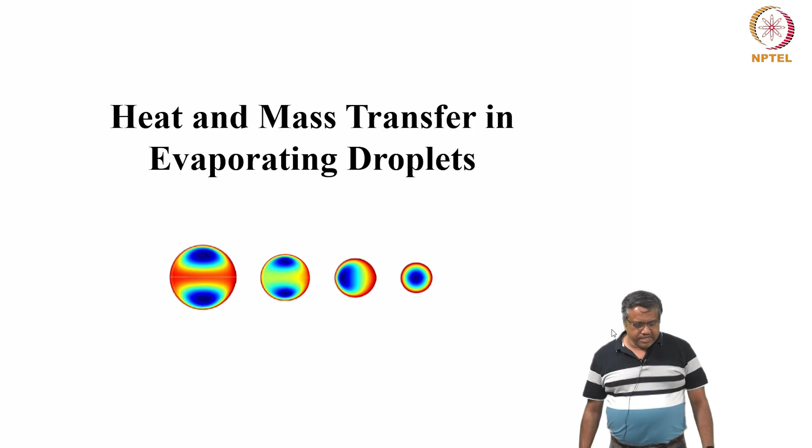So to understand the evaporation of droplets, we need a little understanding of how the transport processes actually take place. This picture that you see is what happens inside the droplet while it is actually evaporating. This comes from our own work - just a picture for now, but more on this later.

We start with the typical motivation - it is there everywhere. Sprays are everywhere, atomization is everywhere, so evaporation will be everywhere too. It's used in, for example, spray combustion, which most people here are accustomed to, and which we'll cover a bit later. There's also spray cooling, where you cool a surface, and spray drying, which will also be covered later in the course.

This isn't going to be covered, but it's something we've widely worked on - during COVID, the aerosols that come out of our mouth are also a spray that evaporates, and that's what infects you. The basic mechanism is still the same. What I'm trying to harp on is it can be a fuel droplet, a milk powder droplet, a polymeric droplet, or your respiratory fluid - there's salt and water in your mouth. The basic principle remains the same: it's evaporation of a droplet.

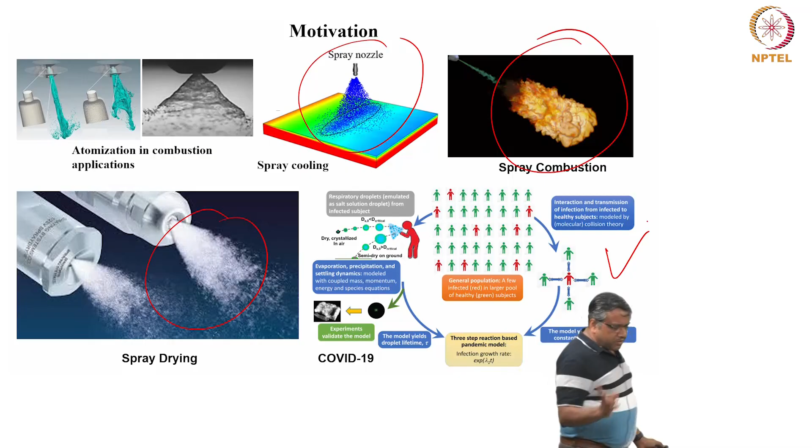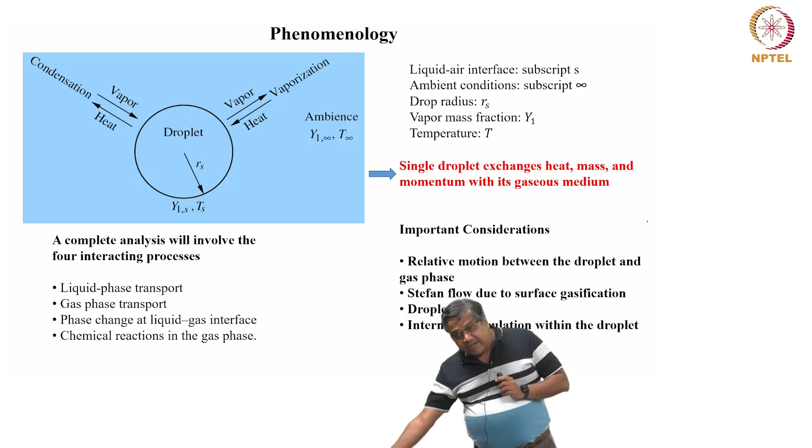Based on that, we're going to go a little deeper. What is the phenomenology of this? Here is a droplet - we're not talking about a droplet cloud, this is a single droplet. What processes can happen? This droplet exchanges heat and mass with the surroundings, with the ambient. The ambient can be of different types - heated, cooler, convecting, at any pressure, at any temperature.

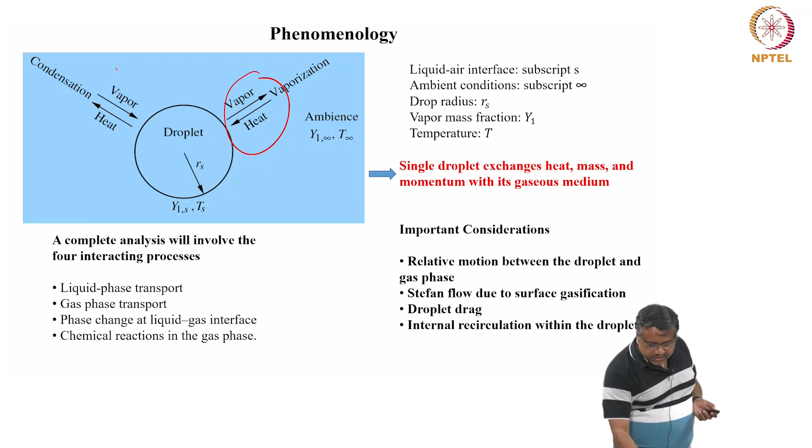If you want to analyze this particular problem, these are the processes shown, and this is the ambience. Ambience is always subscripted with infinity. And this S that you see is on the surface - meaning surface on the vapor side, not the liquid side.

A complete analysis means you have to solve a coupled set of equations in the liquid phase as well as the gas phase. You have to solve the Navier-Stokes equation in both phases, the energy equation in both phases - basically the temperature equation - and if there are multiple species involved, you have to solve n-1 species equations too. Not only that, phase change is happening at the interface.

Remember, this is evaporation - it's a surface phenomenon, so phase change happens at the interface. Therefore, you need to account for that, and all these equations have to be matched at the interface - liquid phase, gas phase, matched right there. And if there's a chemical reaction, which happens in combustion - combustion never happens in the liquid, it still happens in the gas phase, but it's a little removed from the droplet surface.

Where the flame will be placed is something we are going to talk about next, in droplet combustion.

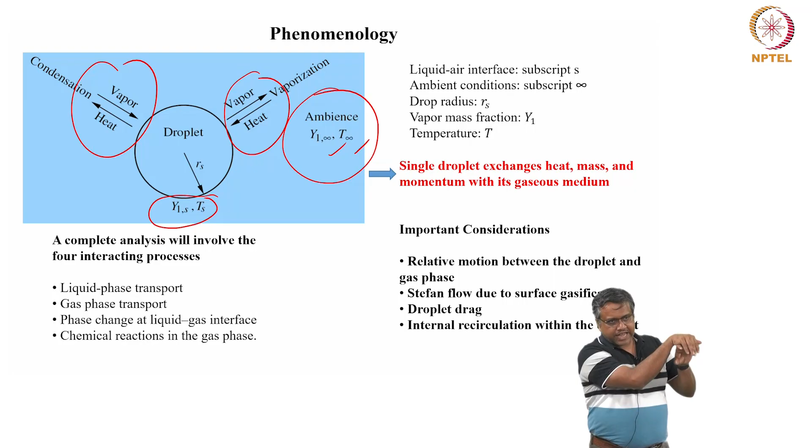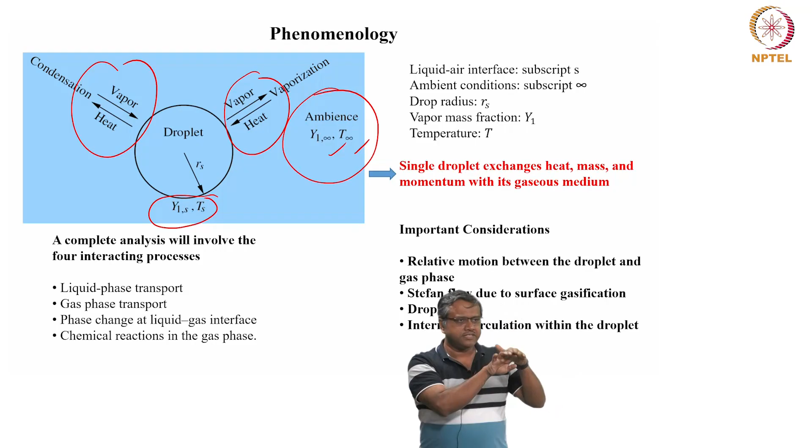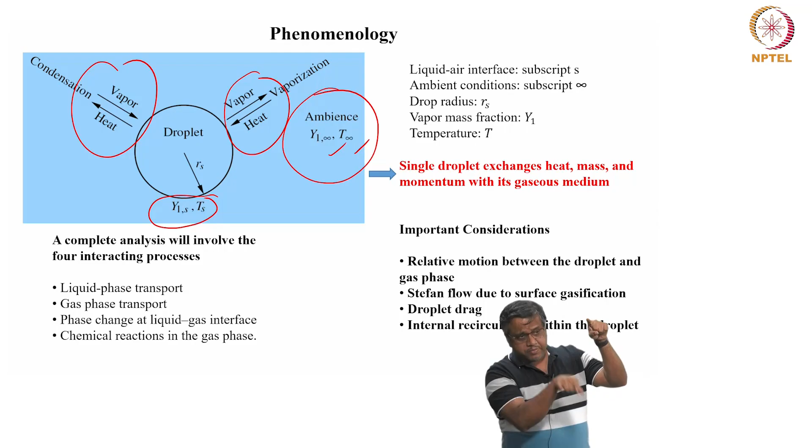There is also droplet drag because the droplet is trying to be decelerated in whatever flow field it's in. Since it's a droplet, not a solid particle, if there's flow on the gas phase side, there must be flow inside the droplet too. But the flow will be highly attenuated because of viscosity, since you have to match the shear stress at the interface. So it naturally slows down, but there will still be flow inside the droplet.

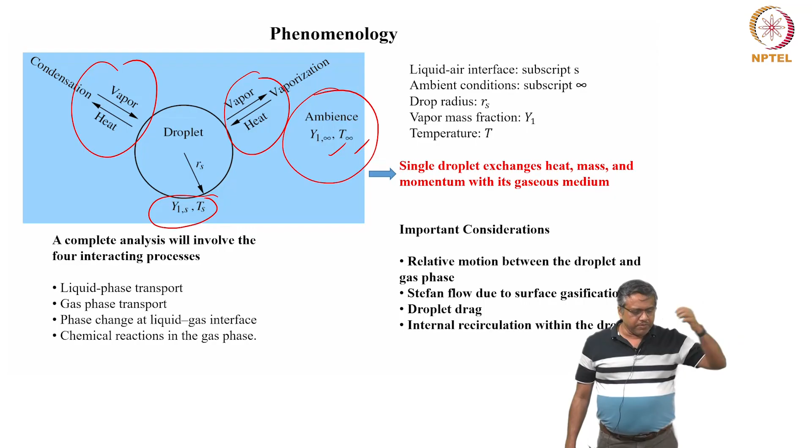We're talking about all these things because they're very important for the next stages. A single droplet, which seems like a simple thing exchanging heat, momentum and mass with the surroundings, is actually a set of all these difficulties.

There are other twists: the droplet can undergo deformation as it evaporates, so it may not stay in a spherically symmetric configuration. With multiple species, there are varieties of possibilities. Also, the droplet can be in an oscillating gas flow field, an aspect not usually touched in the literature, since it can be in a vortical field, a shear field, or many other configurations. Because of these crazy configurations, their heat and mass transfer is rather different than a straightforward flow. The droplet isn't like a bullet or a straight arrow - it can do all sorts of complex things.

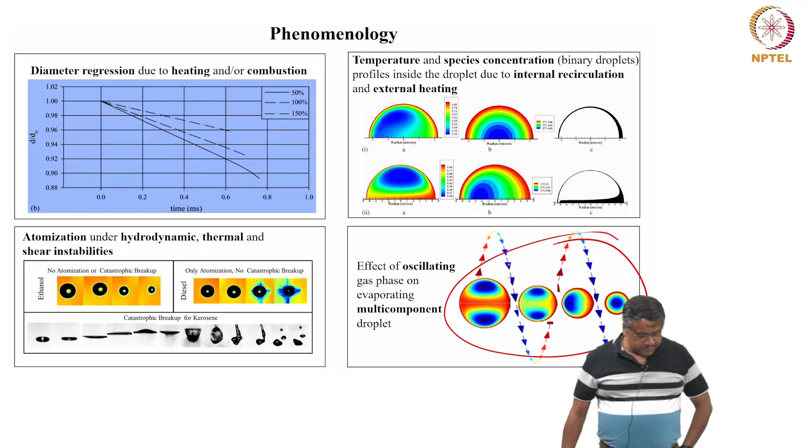This is a complicated problem, exactly the lower part you see here in an oscillating flow field. This has also been covered by us in a recent paper, looking at it from a COVID perspective.

Let's understand the transport processes in more detail. The idea is simple: the middle one is a droplet and it shrinks. So first you need to answer how the radius decreases with time - that's what you're concerned about. How does the radius shrink as a function of time? What is that function?

We can first break the problem down and forget about convective effects for now. Let's look at it just from a droplet evaporating in a quiescent environment. So we bring in the concept of quasi-steady, which we'll examine in terms of what it actually means.

The droplet and the corresponding field variables - T for temperature, Y as the mass fraction of the vapor, and C - everything around the droplet is spherically symmetric. This is usually the case.

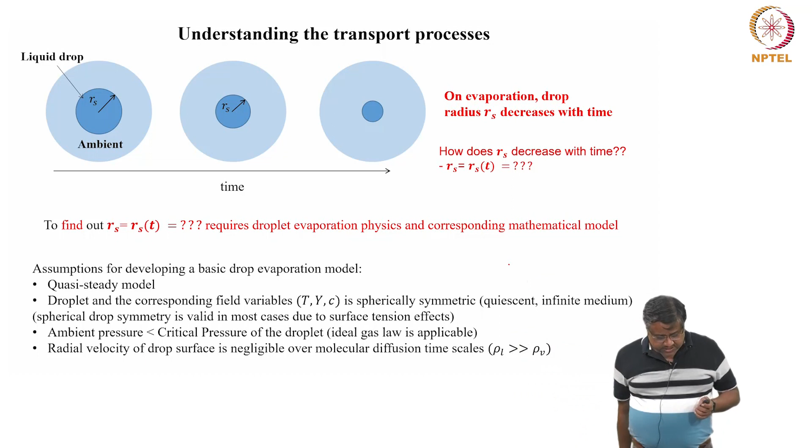The ambient pressure is lower than the critical pressure, so you're not dealing with a droplet near the critical point - supercritical conditions are not considered here. We'll come back a little later to what that exactly means.

How does the evaporation process actually work? If you think about it, there's a droplet which contains, say, a volatile component X. If it's a water droplet, the entire thing can evaporate. But if it contains some non-volatile material, that material will still remain inside the droplet.

Okay, so what happens first around the droplet: if this is a water droplet, for example, easiest to understand, you form a layer of vapor, water vapor. And then there is an ambient which also has water vapor, like this room. If I place a droplet, I'm talking about the space near the droplet, and by ambient I mean what is happening far away. So what do you think is going to happen?

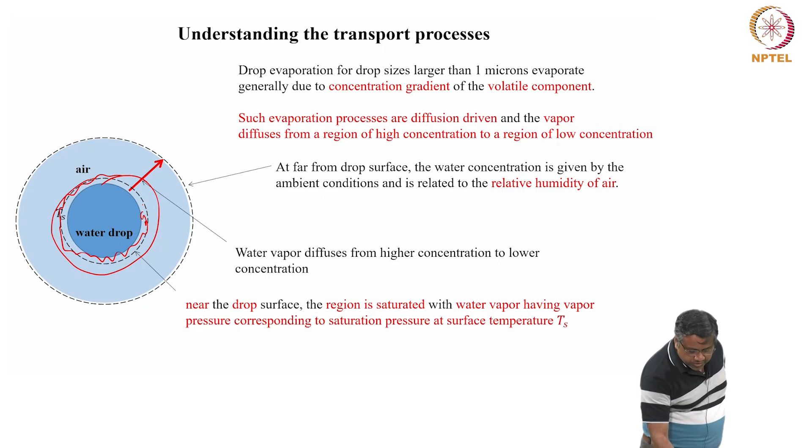There is a concentration gradient created from here to here, and because of that there will be what we call Fickian diffusion—diffusion of water vapor from near the droplet surface to the ambient. So you evaporate, creating this water vapor film, which can be any vapor actually. The ambient is at a much lower concentration, so the vapor slowly diffuses away, creating space so you can evaporate more. This principle is very simple to understand.

That's why you can dry clothes during the summer when it is not humid. But in Chennai summer, which is humid, it takes a lot of time to dry, simply because higher relative humidity means that at the far field there is a lot of water vapor. So this concentration gradient is weak—the gradient is not steep enough—so you are not removing the water vapor in a fast fashion. So as with any transport system, higher concentration to lower concentration, there is diffusion, and this is molecular diffusion.

Here lies the catch: the droplet region around the droplet surface has got a temperature T. That region is saturated with water vapor, which has a partial pressure same as the saturation pressure at that particular temperature. So if the droplet temperature is say 60 degrees Celsius, that space will be saturated with water vapor also at 60 degrees Celsius. That is the saturation concentration.

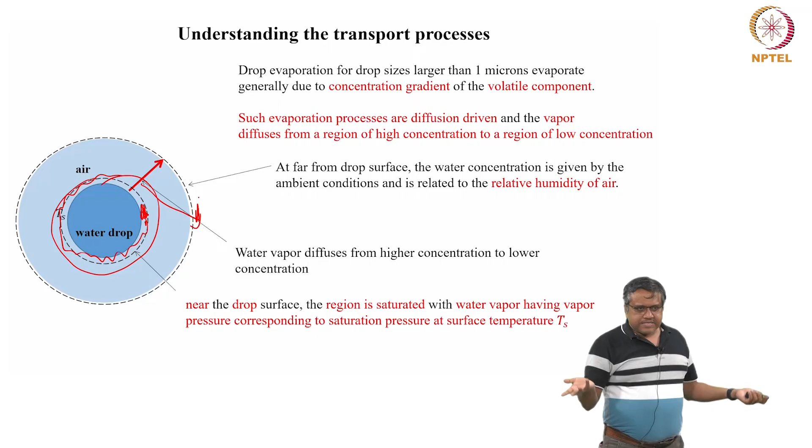This is the basic mechanism. You don't need to be nervous—this is the same thing as drying your towel or whatever you do at home. This is the same principle. This is not just for droplets; anything that you dry has got the same principle.

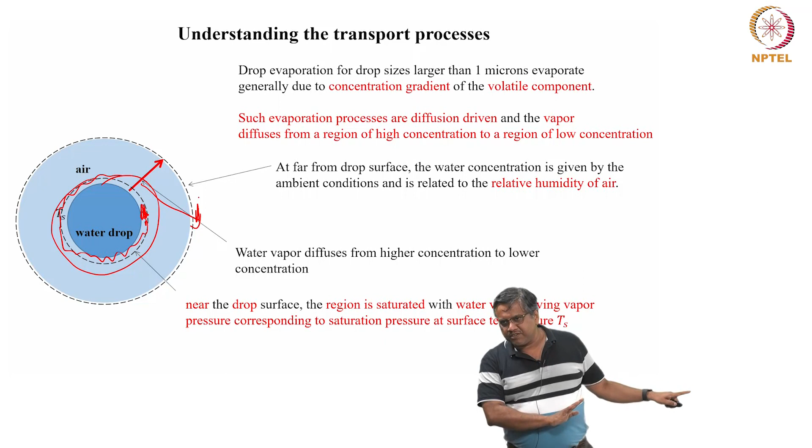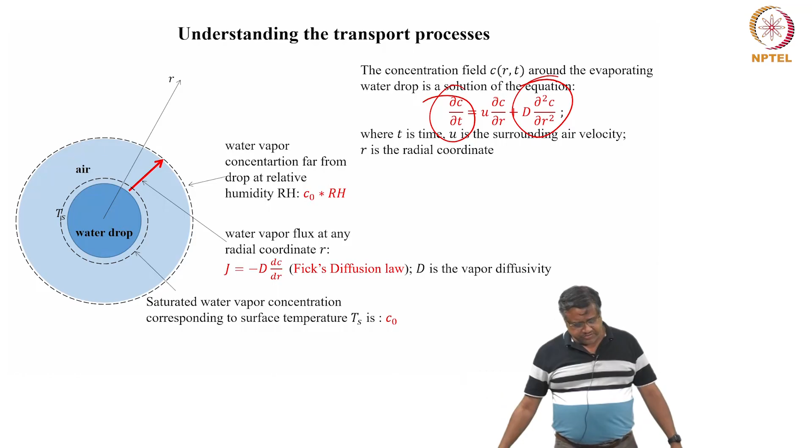So how do you actually find this out? You start with a concentration field around the evaporating water droplet, for example. The equation you see has a convective term, but if there is no air velocity, that term drops out, so now you are left with this and this. You can write it in a 3D sense with the r, theta, phi components, but I'm just talking about the radial direction because it is spherically symmetric—that is what you have taken.

This is Fick's diffusion law. As you know, D is basically the diffusion coefficient—water vapor in air is well known, or it can be ethanol-air, or anything you can think of. This D is a material constant, a material property, derived, measured, and calculated in varieties of ways. We are not going into how you get this information, like thermal conductivity or mass diffusivity—this is a complicated mixture of quantum mechanics, measurements, and theories. But this is known, this information is available.

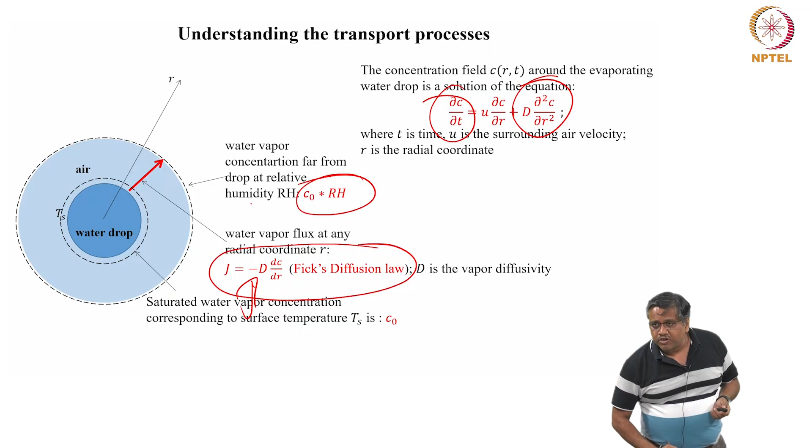And the water vapor concentration far away is given by the concentration at the surface and the relative humidity. So this is the equation that you ultimately have, if you neglect the velocity.

Now comes the question of what I meant by quasi-steady—did I not mention there is something called quasi-steady? The idea is basically you have to drop this somehow, otherwise this equation is no different from an unsteady heat conduction equation—it's an unsteady mass diffusion equation, that's what it is. Not that this cannot be solved, it can be solved.

The idea is that as the droplet evaporates, the surface regresses. Now, if the evaporation process is very slow, the vapor concentration field can readjust very quickly compared to what the droplet can see. So for the droplet, it does not see any change in the concentration field at all. Understood? If the evaporation rate is extremely fast, that means the droplet is shrinking rather sharply.

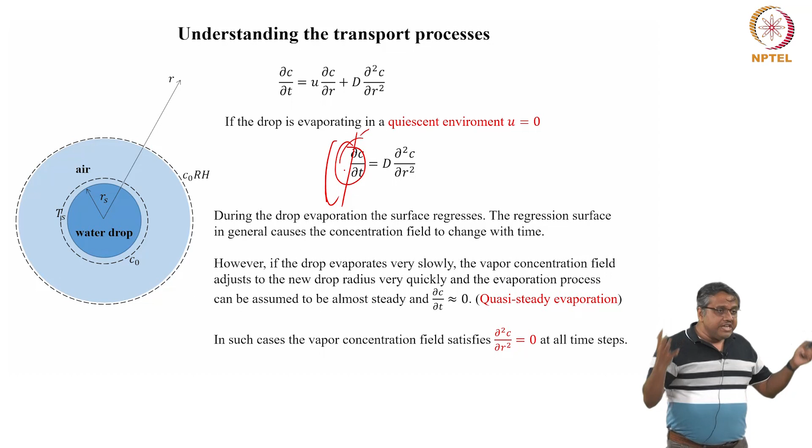This is what happens. I think last time we had this question somewhere, about ballistic heating and stuff like that, or considering cases which are extremely rarefied flows - these kind of things will not hold. So here the concept is evaporation is happening much slowly, so the entire thing gets readjusted before the droplet even senses it. As a result, you drop this particular term, which basically makes it a quasi-steady evaporation process.

So you are left with a vapor concentration field, which is that. And this is rather easy to solve, as mathematically it looks exactly the same like a conduction equation, in one-dimensional conduction equation. That's what it is.

You now come to the question, before we move forward, about a concept of wet bulb temperature. This is also important, particularly when we are dealing with droplets of different fluids, right? Now, what is the normal idea? Let me ask you a question. Say you have a water droplet and you have two ambients.

One is say at 500 degrees Celsius, the other one is say at 450 degrees Celsius. So what will be your expectation? The water droplet will evaporate faster in the 500 degrees Celsius environment compared to the 450 degrees Celsius environment. Am I right? This makes common sense, right? But what will be the surface temperature of the water droplet in the 450 and 500?

Do you think it will be the same? The first question everybody answered, 500 will evaporate faster than 450, right? But 450 and 500, or rather 400 and 500, whatever you take it, will there be a difference in the surface temperature of water vapor, the water droplet, sorry?

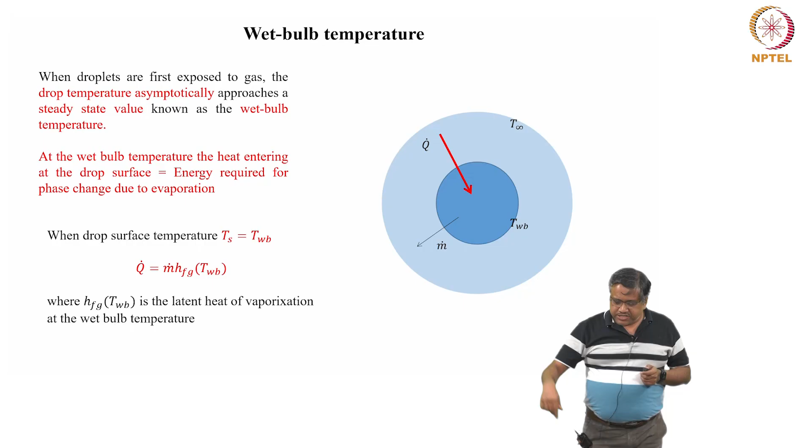Standard rule of thumb says what? If the fluid is more volatile, what will happen? And if the droplet is not volatile, what will happen to the wet bulb temperature? This temperature is called the wet bulb temperature, because this is the temperature at which this is obeyed, where Q dot is the heat that you are supplying, it goes towards the evaporation.

Now the question is very simple. You understood the question. If I have ethanol versus water, what will happen? Which will have a lower wet bulb temperature? Ethanol will have. Okay, fine. And water will have a higher.

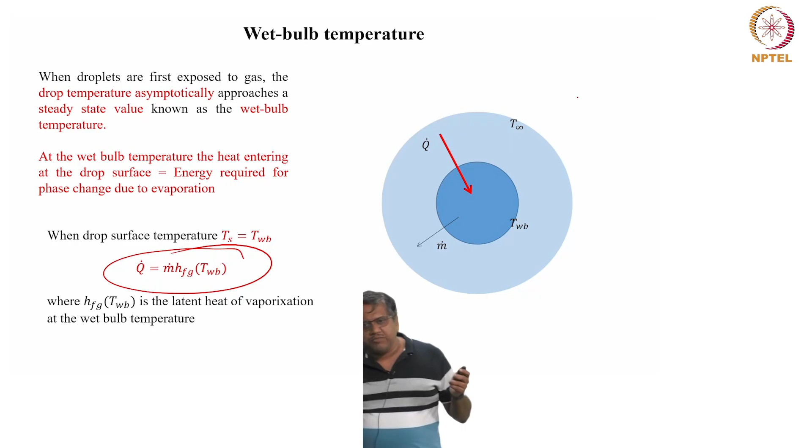And what about diesel? You have to look into the HFG curve. You have to look at the latent heat curve and how it varies with different temperature. So the system, you don't have to do anything. You create the ambient, the system will come to its own wet bulb temperature. You don't have to do much about that. It will always do that.

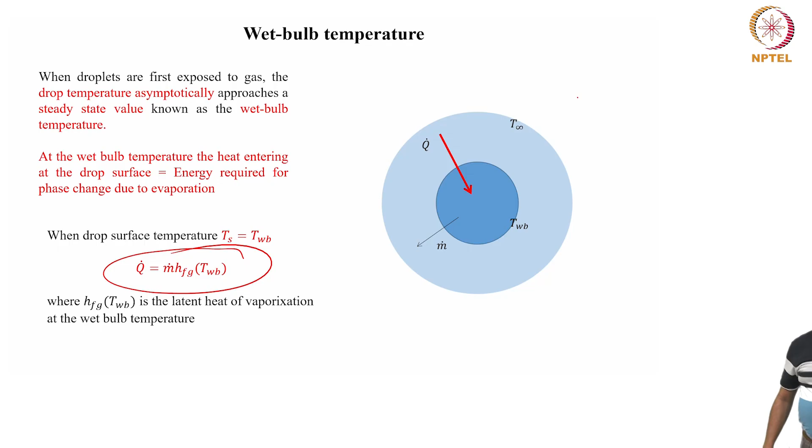Okay, excellent. Now that we have this, how to find out what will be the saturation temperature and the saturation pressure, right? That is what we talked about, because the water vapor film that is formed is at the saturation pressure. So this is given by the standard Clausius-Clapeyron equation. You guys are all very familiar with the Clausius-Clapeyron equation, and you can basically calculate what will be the vapor pressure at the wet bulb temperature.

This offers quick calc. You can also look it up from your steam tables, if the steam table exists. But when you are writing your code, this becomes rather useful because you can incorporate it in the code. Got it? This is valid only for pure fluids, okay? Clausius-Clapeyron equation, or this form of the equation, is only valid for pure fluids. Because the moment you try to do it with binary liquids or binary fluids, this is not applicable in its current form.

There is a version of it called Raoult's law, which is applicable when the vapor pressure gets suppressed. It's also very interesting to understand that you have the droplet and the vapor film that forms at saturation. That vapor pressure is nothing but the saturation pressure at that temperature.

Now, if you consider Raoult's law, if there is another competitor present inside the droplet, what will happen? There is competition for the same space. There's one space, there is competition. So the vapor pressure is accordingly decreased depending on the amount of solvent present in the liquid phase at the surface. These are the things you have to account for when calculating evaporation.

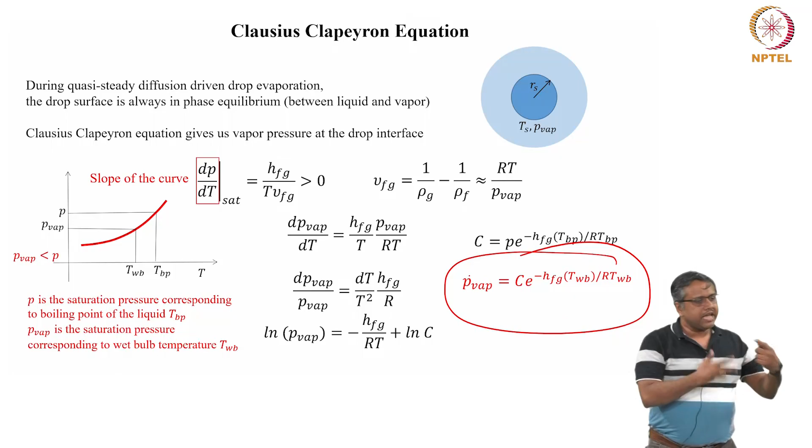Now that we have set the stage, we know what a wet bulb temperature is. We know that principally when there is no flow, it is all diffusion driven - it's a concentration gradient. We know that the temperature of the droplet surface is kind of constant, and that the vapor pressure is at the saturation pressure at that temperature.

Now, depending on whether there is flow or not, there are about 6 types of droplet vaporization models available. The first one is a constant temperature droplet model - essentially what we just did.

Then there is something called the infinite liquid conductivity model, in which you account for the temperature of the droplet to change with time, but not with space. So the droplet is at the same temperature, but that temperature changes with time.

Then there is the spherically symmetric transient droplet heating, or conduction limited model, in which you take that there is a temperature gradient within the droplet.

The fourth case is the convective droplet vaporization model. That means there is a convective flow outside the droplet, and somehow, through your conductivity, you are incorporating it into the liquid phase.

And the fifth model, the most well-known part of the model, is the vortex model of droplet heating, in which you have what we call a Hill spherical vortex created within the droplet. The idea is that you do not solve for the momentum equation within the droplet - it relieves you of some of the burden.

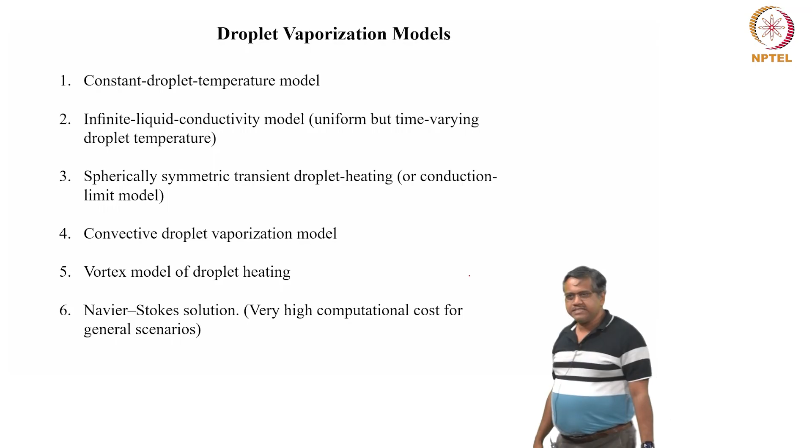All right, so imagine it is just one droplet. You can manage it, but for a spray, a multi-droplet system, where there are interactions between the droplets, things will get a little messy. So that sets the stage.

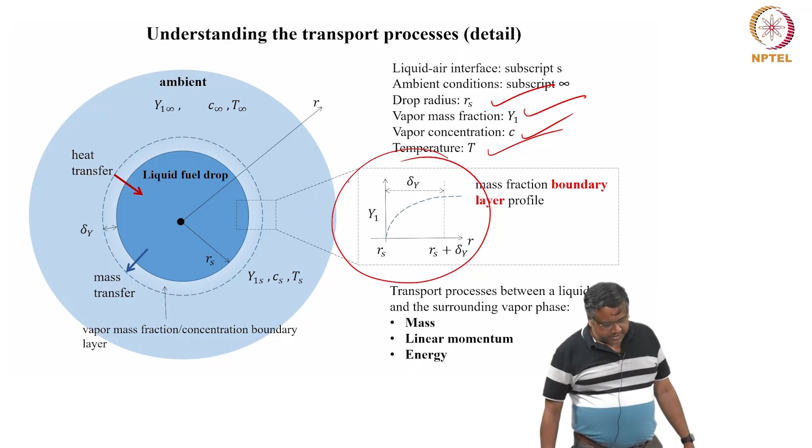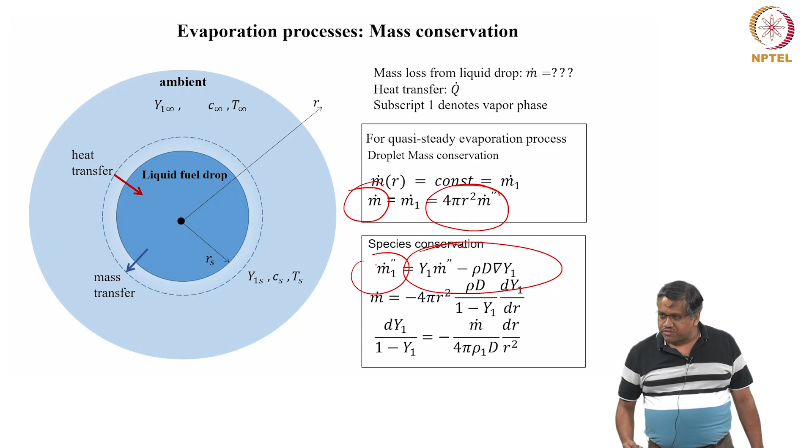So, what is the mass loss from within the droplet? If you call that m dot, that is the mass loss happening across the surface. And if that mass loss is now converted to a species conservation equation, you do a simple integral. If you integrate everything out, there is a little bit of math involved, but this is rudimentary math.

You will arrive at something like this, the instantaneous droplet radius. This is how it is given. Here, if you see, whatever is inside is logarithmic.

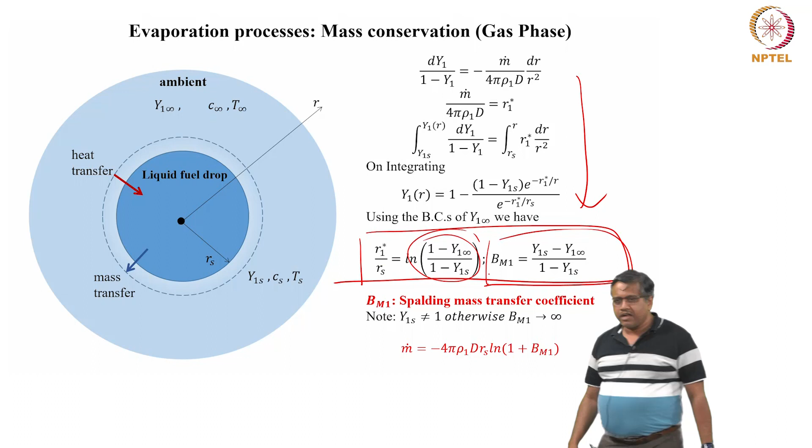That is actually given by something called BM, a number called BM, which is called the Spalding mass transfer coefficient. Don't read too much into it - it is named after Spalding, he was the one who found it. If you find something, you can name it after yourself, but essentially this is the same.

This is nothing but the concentration gradient - if you look at it, it's just that, nothing more, nothing less. There is a logarithmic term which naturally comes out if you solve this equation. So in this case, m dot, the mass loss, is given by this expression. If you look at it carefully, D is the diffusion coefficient, rs is the droplet surface radius, and inside the logarithmic term you have 1 plus BM, where BM is given by this.

So bm is nothing but again the differential, okay. If bm can go to infinity, technically, then you actually have a problem, okay. That means when y1s is not equal to 1.

But given these considerations, if you look at this section very carefully, more is this differential, more is the value of bm. In two ways it can become more: your y1s can become larger, once that becomes larger your numerator becomes large, your denominator becomes small. So therefore your bm rockets up. So actually the curve looks not like a very linear increasing profile with respect to y.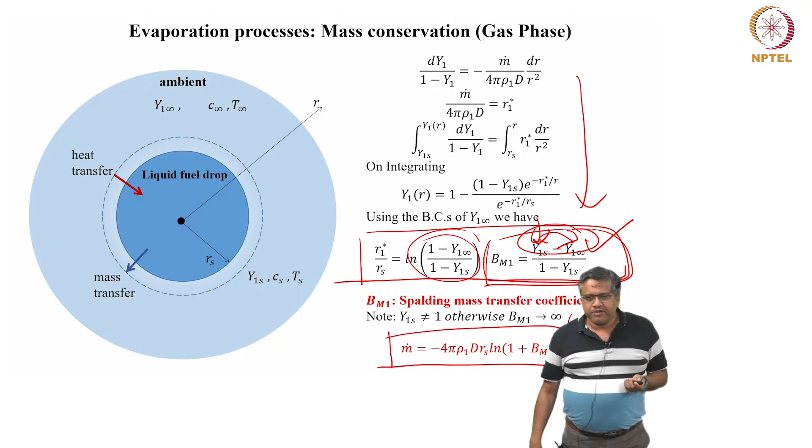Very easy, okay. There is of course a catch, like all things. And what is the catch? Can anybody think about it? We all talked about this mass, right? There is a vapor layer. There is no vapor layer at infinity, or there's less vapor at infinity. There is a gradient, and that is what drives this whole process.

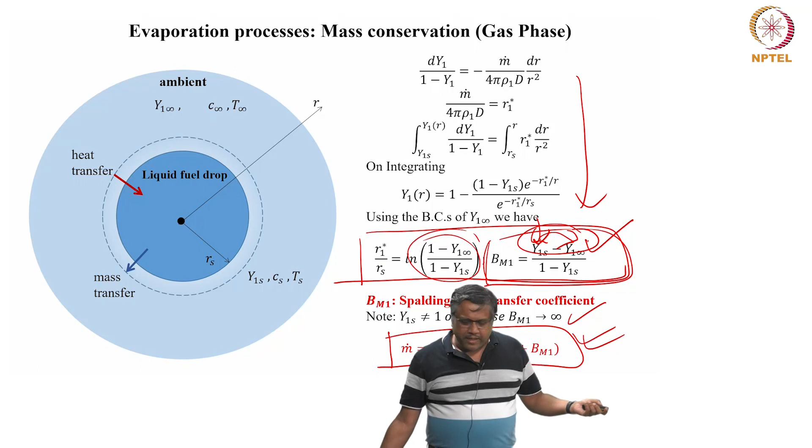However, I twist it a little bit and say that there can also be an energy conservation counterpart to it. What we have looked at is mass. What about an energy conservation? How will the energy conservation be done?

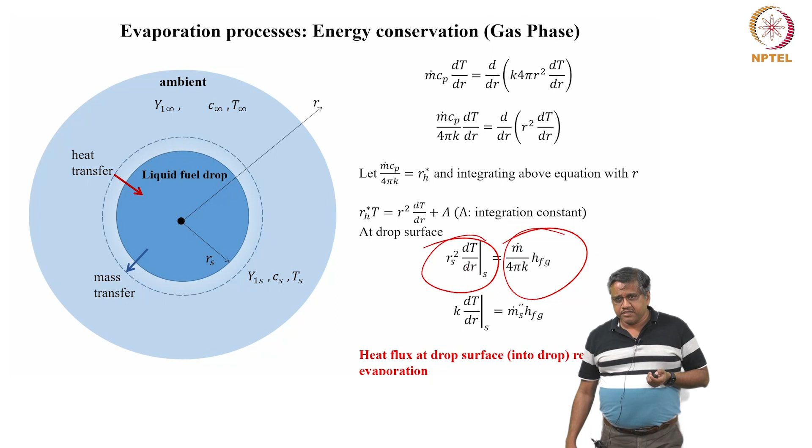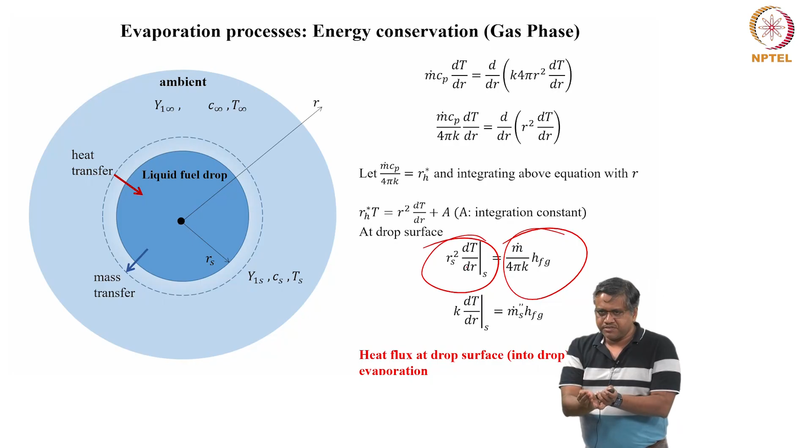Again, you match it at the surface. Whatever heat is coming, because that is going towards HFG, right? That is possible. So the heat flux at the drop results in the evaporation. This is another way of calculating it, because you have your wet bulb temperature, there is heat coming, and you know that this is a budget. This is also once again a conservation, and it's a valid argument.

So the moment you do this, and then you go through the equations, once again very similar to the species equation. Remember, species equation and energy equation are more or less the same. You get one other quantity like this, which suspiciously looks like the mass transfer number, but it has the same thing - there is a delta T now. T infinity is the temperature at infinity, or the ambient temperature, and Ts is the temperature at the surface. So once again, there it was the concentration gradient, here is the heat transfer gradient. This is called Bt, which is basically the Spalding heat transfer coefficient.

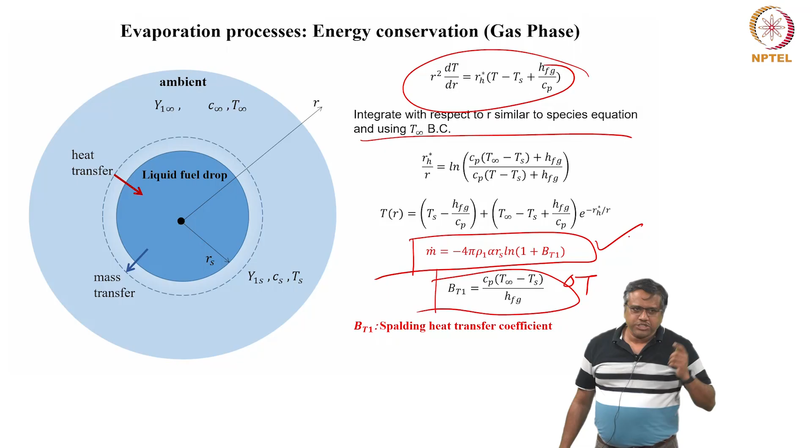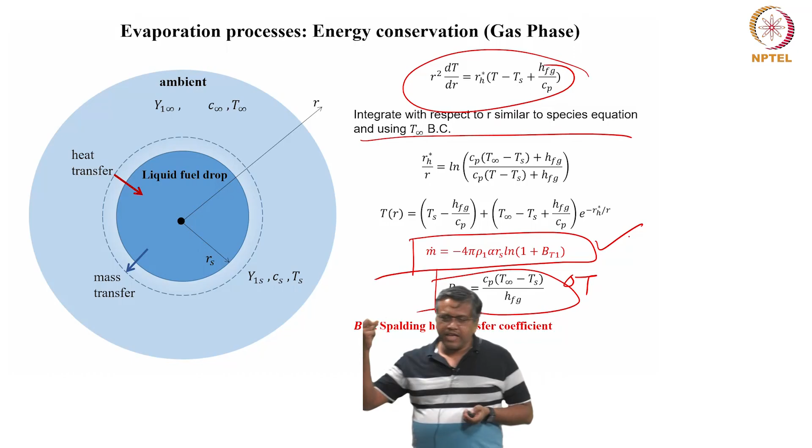So you get one more expression for m dot. And this time, this expression does not have d - what should it have? It has alpha, which is basically the thermal diffusivity. Under which considerations do you think thermal diffusivity and mass diffusivity are the same? So Lewis number equal to 1. Don't you see in combustion there is something called Lewis number equal to 1 fuel and stuff like that?

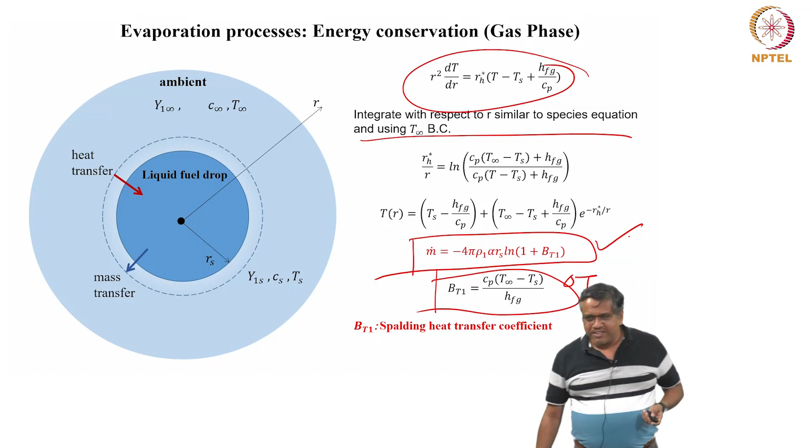So the idea is, you have a mass conservation giving you an m dot, you have an energy conservation giving you an m dot. This m dot has to be equal on both sides, because otherwise you are invalidating one. In the special case where Lewis number is equal to 1, Bt and Bm are the same, because these two expressions are exactly the same, except alpha and d.

So in normal ways, what happens is that if you want to solve this, you normally consider what we call the rate limiting step. That means you have to assume these are twins - one is your heat, one is your mass. One cannot run ahead; the slower of the two determines the process, the other one has to adjust. So that is called the rate limiting factor in evaporation.

So that means you can have a stupendous diffusivity and things, it just goes kaput - it is not going to help. You need to have both run in unison. So that's why you sometimes validate these two things in a loop. But ideally in Lewis number equal to 1, which normally water is not, you normally will have no issues - you can approach it from either side and you will solve the problem.

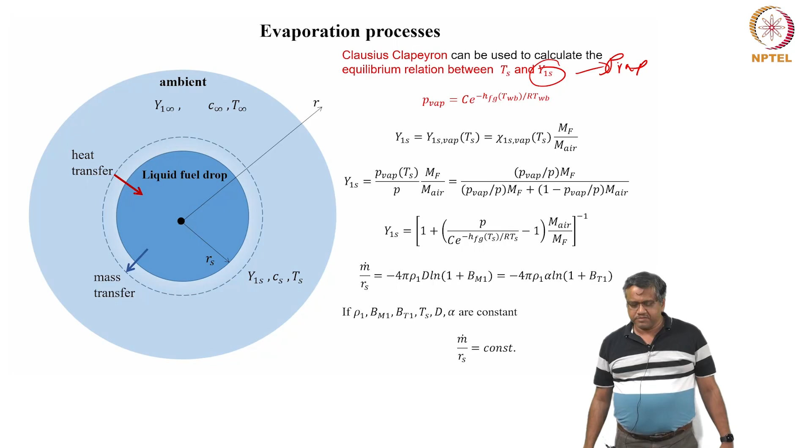You understood, right? This is understandable. What is a mass transfer limit? What is a heat transfer limit? Comes in very handy. Then you calculate the Clausius-Clapeyron equation to get the equilibrium between Ts and Y1s - that's what Clausius-Clapeyron does, because Y1s is the same as your vapor pressure. All right, so once you do all these things, this is the evaporation process in a nutshell.

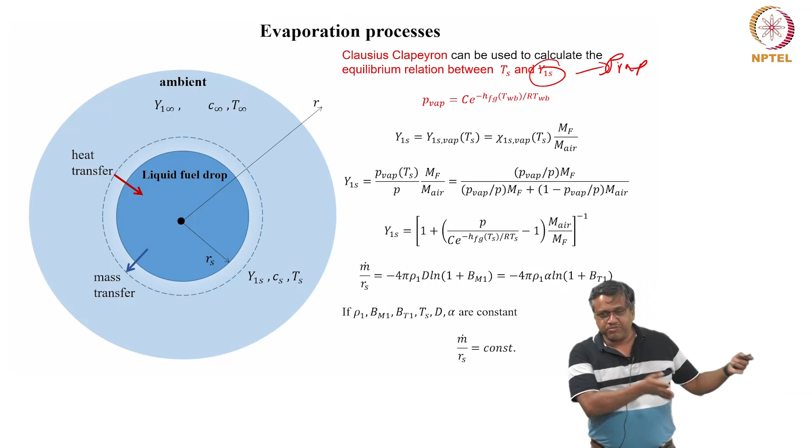You can do all the math that you want. You can do it better than me. You guys are closer to your IIT JEE pass out year or whatever entrance exam you've taken. I'm much removed from that, okay.

So now comes the droplet lifetime, because your boss might ask you, give me a number, don't give me all these sermons about heat, mass and all those things - give me a number. So how long will it take for the droplet to evaporate? So m dot, you can cast it in terms of d square or r square, because it's a mass, it's a spherically symmetric thing. So it is shrinking like that. And if you equate this to the two rates...

In the case that these two rates are the same, this will now be equal to a constant k. If you do the math, just look at it - this k, in whatever way you cast it, is called an evaporation constant. It's not just a constant, it has all these terms inside it, including the density ratio, Bt, and other factors. But for a particular setup, it's the same - that's why it's called a constant.

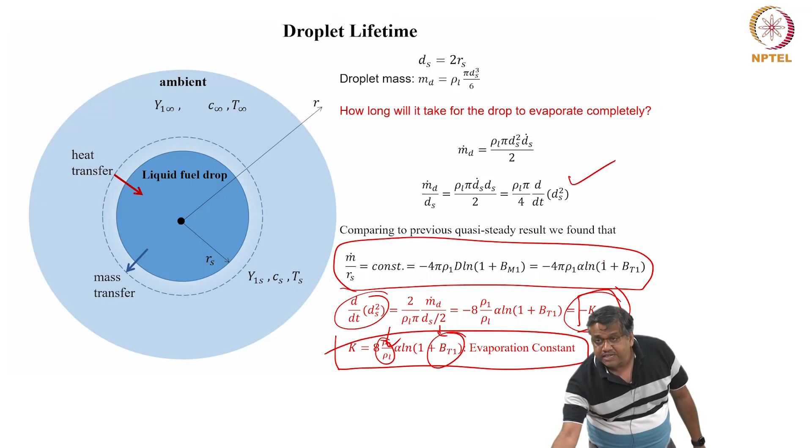So what are the variables here? You have this, and on the right hand side, you have minus k. Once you do this, it's a straightforward integration and you will get this expression.

This is what we call the very famous d-square law. Initially, if you look at it, there will be a region where it will not be valid, and then it will drop. So d square is basically linear with respect to time, and the slope is constant. If you differentiate it, all the slopes are the same, but it doesn't give you an idea. For example, kerosene and JP4, these are two fuels - they will differ depending on the initial diameter that determines the time. It's actually the square of the diameter that is linear with respect to time, so it's easily understandable - small droplets evaporate faster than larger droplets.

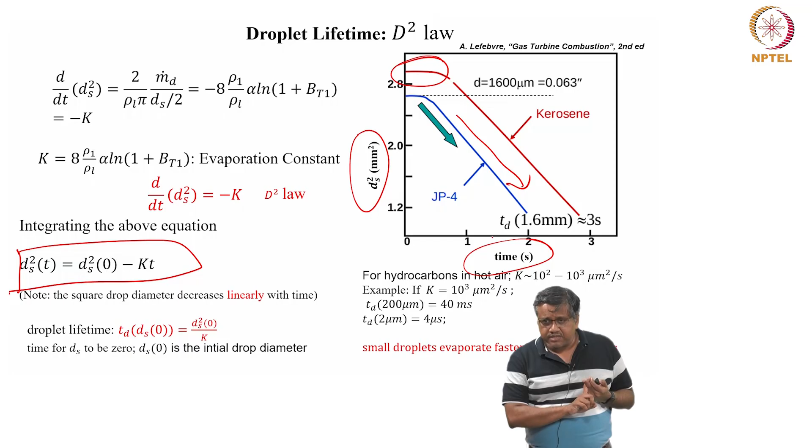So this is the d-square law, but look carefully - the d-square law has what assumptions? First and foremost, it was quasi-steady, then it was spherically symmetric. Only then do you get the d-square law. So don't apply it everywhere - that is the sermon. So this is the droplet lifetime.

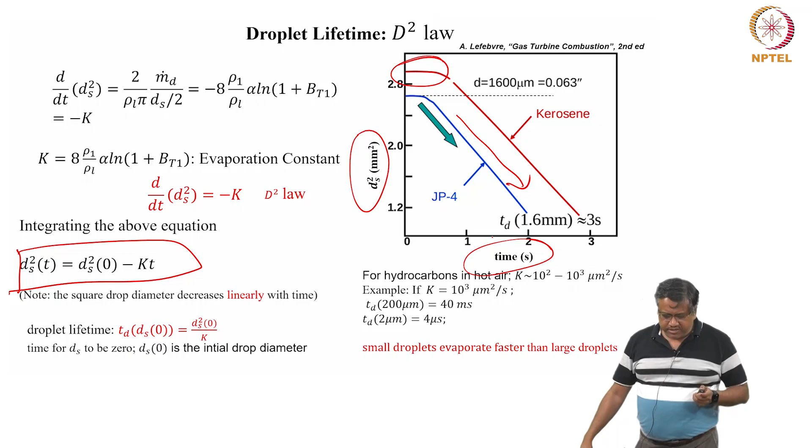Good enough? So we know how to get to the droplet lifetime calculations in a pedagogical sense, and you can calculate this evaporation constant from either of the two processes. If you look at the expression for K carefully, you will see there are certain peculiarities - denser liquids actually evaporate slower, and volatile liquids evaporate faster. Got it? Okay, good.

So this concludes this part - you have something like a d-square law, you can predict how it will evaporate because it depends on that factor K. And K is a function, as you saw, of ambient temperature, surface temperature, thermal diffusivity, specific heat - all kinds of quantities that you have access to. You know where you are putting your droplet in. You can calculate the wet bulb temperature and find out what will happen.

The sensible heat part of the lifetime of the droplet is very, very small. Very quickly it goes to the wet bulb temperature and freezes there. You can expect it because sensible enthalpy is rather low.

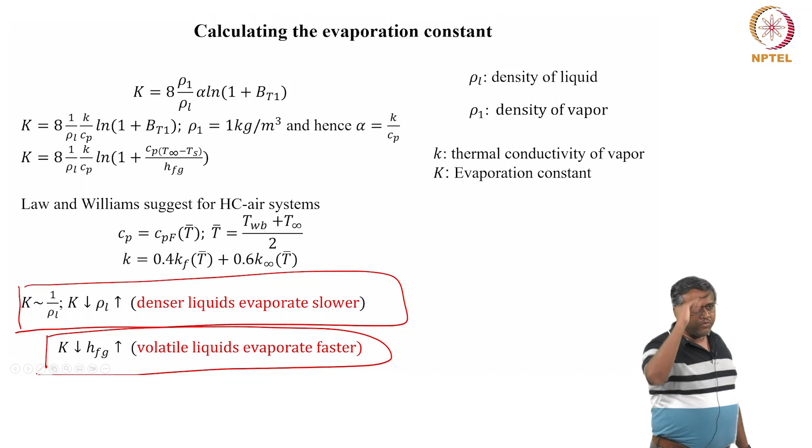Now, Lefebvre and others did something which is quite interesting. They said that this is of course when there is no flow, there's nothing. Now, when there is a flow around the droplet - because you are honestly not interested in problems in which the droplet is there in a quiescent environment, right?

That problem is good for understanding, but it is not good from a practical point of view.

So what Lefebvre did was, once again here, all kinds of correlations come into the picture. There was a lot of data available, and using this data, he assumed that we could increase K by including a Reynolds number factor on it.

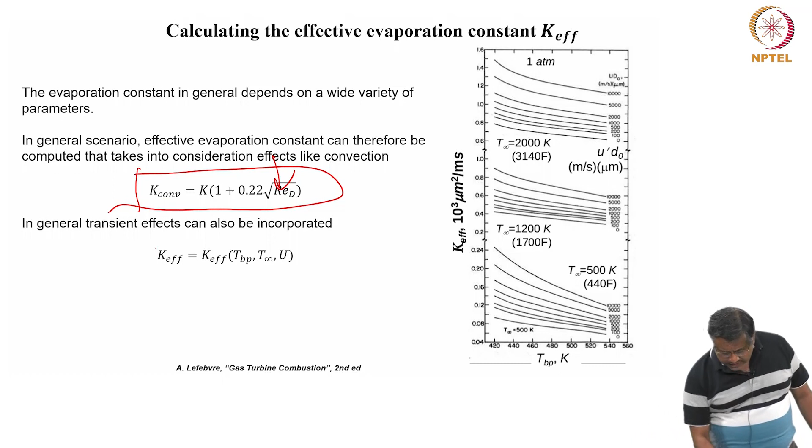Absolutely no physical meaning, okay, it's just a correlation that works. So what he did essentially was update it using what we call K effective, that means K effective evaporation. You can also do it in a nicer fashion if we put this inside the K conductivity term, the thermal conductivity. So the thermal conductivity is basically jacked up to account for this additional effect of convection.

Sounds very akin to your turbulence models, right? In your turbulence model, you have the nonlinear parts, or basically the parts which you don't have any idea coming out of the statistical moments. You model them by using an effective diffusivity. It's like using a single quantity for a very large scale kind of phenomena. Ad hoc, but sometimes in certain cases it works. So when you are going to use it, you have to use it with a lot of caution because these do not come from any physical arguments as such.

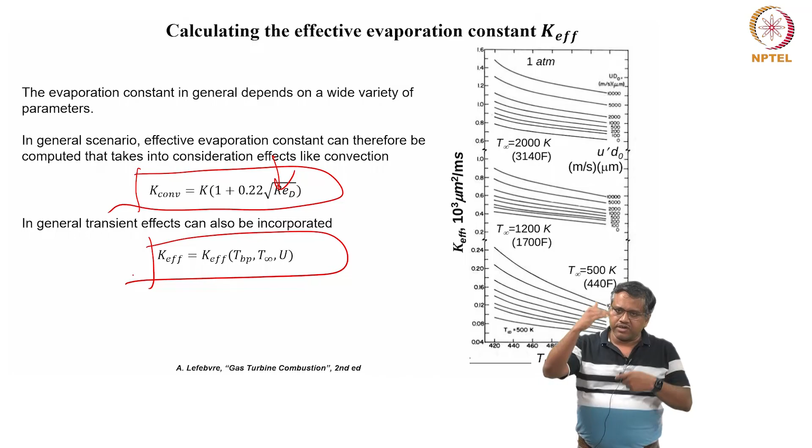Before this point, it was all physics, right? We had the exact assumptions and we had the exact outcomes. Now this is not physics, okay, remember that. But this is useful, we are not telling that it is useless. It is useful, but you have to know under what range, under what considerations this was actually proposed, like your turbulence models. All right, now you go to the 1D convective droplet vaporization model.

That comes next, when you actually have your convection, what happens? So what happens when you have convection? This is your velocity scale, this is how your velocity actually changes, right? U infinity is the flow velocity of the surroundings, and this is how the velocity is going to decay.

Okay, so this is the coefficient of drag, and these are certain quantities. This drag coefficient is also a function of your Reynolds number. For a one hour class, it's almost impossible to say what these things are. And there is also something called the average gas viscosity, which you see over here. This actually comes from a very peculiar notion, and we'll try to explain it as much as we can.

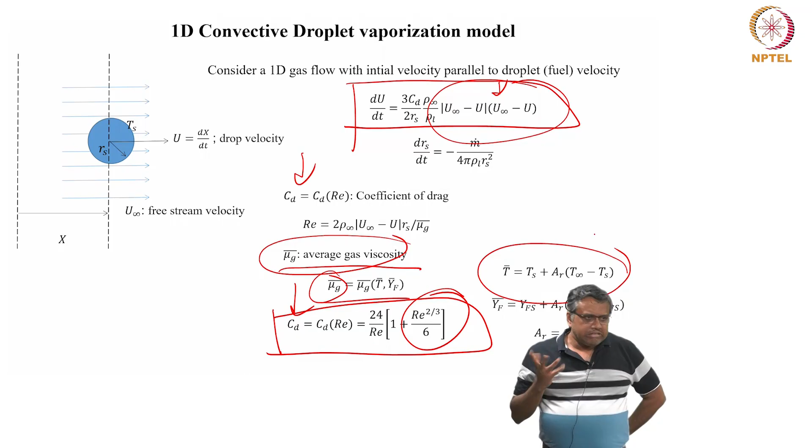There is a concept now that we are going to develop, which is called the film thickness and the film properties. So as we saw, there is a vapor film that surrounds this particular droplet. So what will be the temperature of that vapor film? If I ask you that question, the answer will be kind of, I don't know, it could be anything, right? There's the surface temperature, which we know is T sat, and then there is a temperature T infinity. So what will be the temperature of this vapor film?

So you can ideally do integration, you can actually find out the length that this boundary layer actually extends to, and you can do your fancy math and come up with some number. That is probably the correct way of doing it. But a quick fix way of doing it will be, there's something called the 1/3 law.

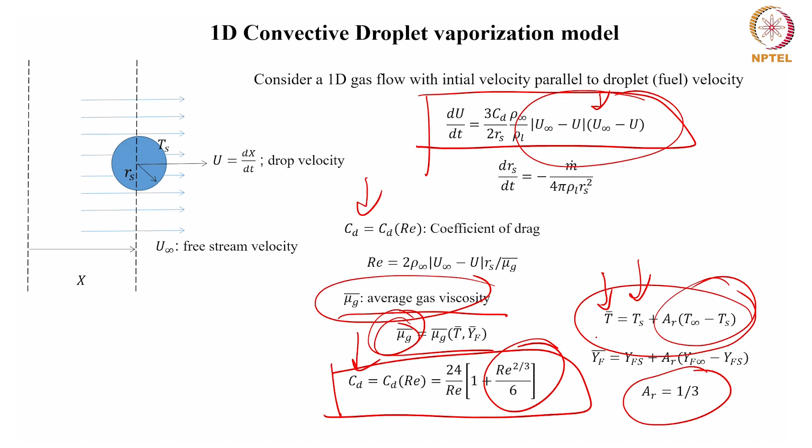What it does is, it is the surface temperature, as you can see, plus 1/3 of the difference in temperature between the surroundings and that. So it gives more weightage to the surface temperature because that is where it is, and it gives less weightage to the temperature differential. And all the properties are therefore evaluated at that temperature. So this is the temperature you evaluate, this is called the film temperature. And all these properties, whatever property we talk about the film, that is evaluated at that temperature.

Understood? These are all correction factors which make your results more and more reliable, so to say. Don't ask exactly why it is 1/3.

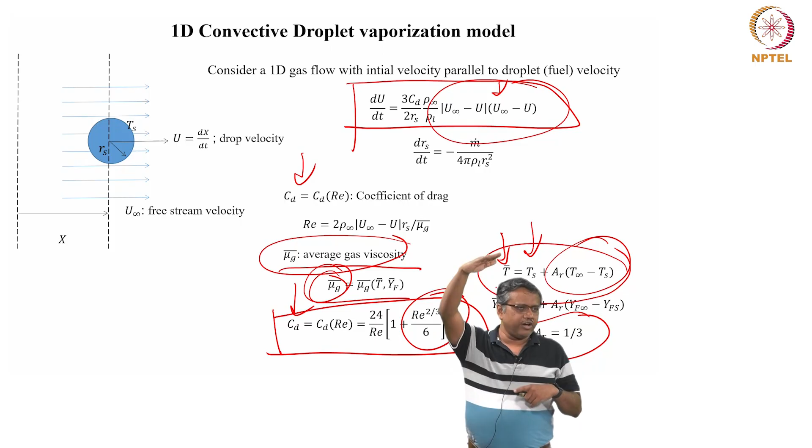Ideally, you should do an integration of the whole boundary, like you do your flat plate boundary layer calculation. You extend this delta, and this is how you calculate the whole system. It's a very similar way. You can do it like this.

So now this theory assumes a few things. For if the drop was not vaporizing, there will be a certain boundary layer thickness. Certain boundary layer thickness, okay.

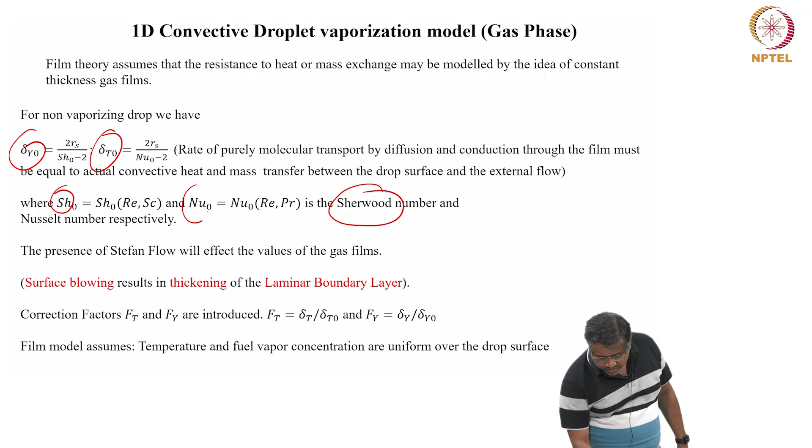And here, of course, your SH, if you have not heard the name, this is the Sherwood number and the Nusselt number. So Sherwood and Nusselt number are basically the same, brothers of each other, in mass transfer and in heat transfer. Nusselt number you all know, Sherwood number probably you are not familiar with as of now.

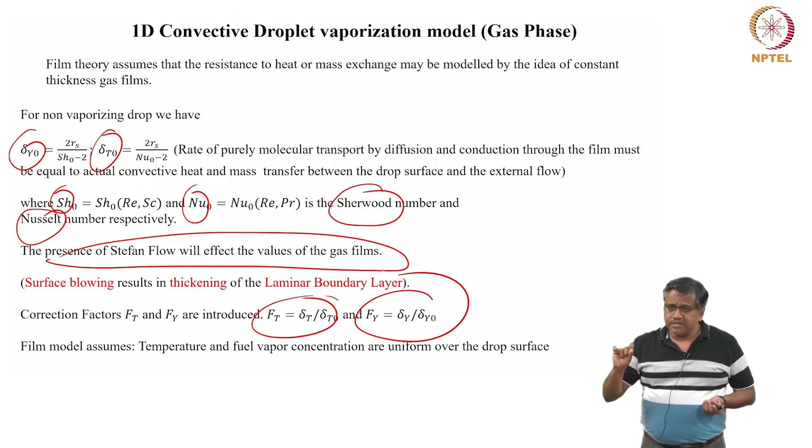And then there are, of course, these correction factors, because both the temperature as well as the species boundary layer are basically thickened because of the presence of surface blowing. This is called Stefan's flow.

So now, therefore, the droplet vaporization is now given by these quantities. Once again, this is the mass transfer, this is the heat transfer. The limit of the two. And BY is the same as BM basically, just a difference in nomenclature. As you can see, both of these two terms are exactly the same as what we did earlier. And this has got a range of validity, what we stated over here.

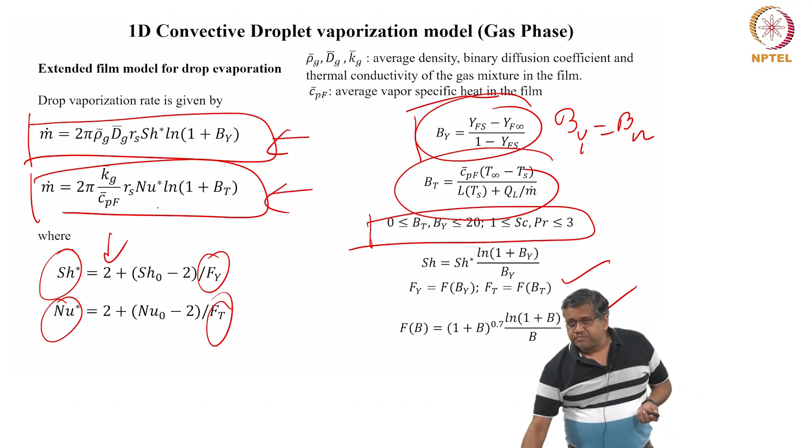Forget about all these things. These are varieties of corrections that we apply, basically the corrections for the surface blowing, which corrects the Sherwood number and the Nusselt number. 2 corresponds to the case of pure conduction, which is the case that we already covered.

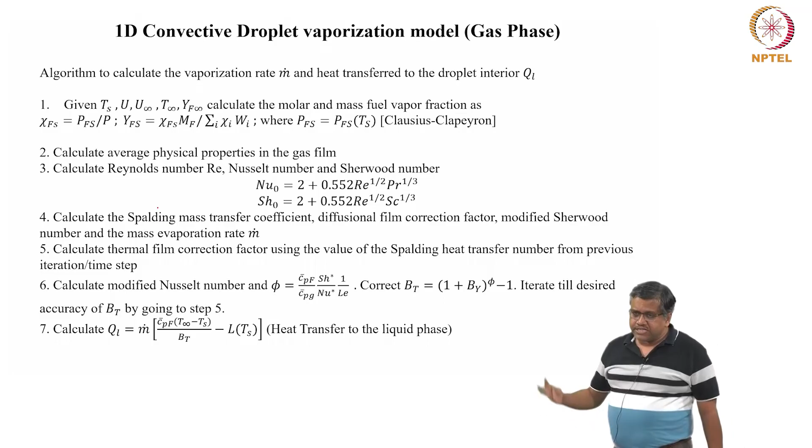So this is the way that you calculate. First you are given your TS, U infinity, T infinity, YF infinity. These are all given, correct? So you calculate the corresponding mass fractions using the Clausius-Clapeyron equation. Then you calculate the average physical properties of the gas film. Then you calculate the Reynolds number and the Nusselt number and the Sherwood number, got it, by these expressions. This expression is called the Ranz-Marshall correlation.

Again, why am I saying this, that you can get away with a correlation? Because otherwise you need to solve for the entire gas field. We have not done that. So a correlation basically makes up for that.

Then you calculate the Spalding mass transfer coefficient, the correction factor, and the modified Sherwood number, and therefore calculate the m dot. Once you calculate, then you do the thermal correction once again. Then you calculate the Nusselt number and correct for BT and BM, and then ultimately calculate what is the QL. Got it? All these things you can write in a Fortran code. I have written it myself. It's not very difficult when you just write it like this. It looks very difficult, but it's not.

So now what happens? This is only the gas phase, right? You have done all these nice little calculations. Now there are a few things that you should know about the liquid phase. First, one thing: I don't care about the flow in the liquid phase. For me, the liquid phase is spherically symmetric, and then there is transient heating. That's the first assumption that I have.

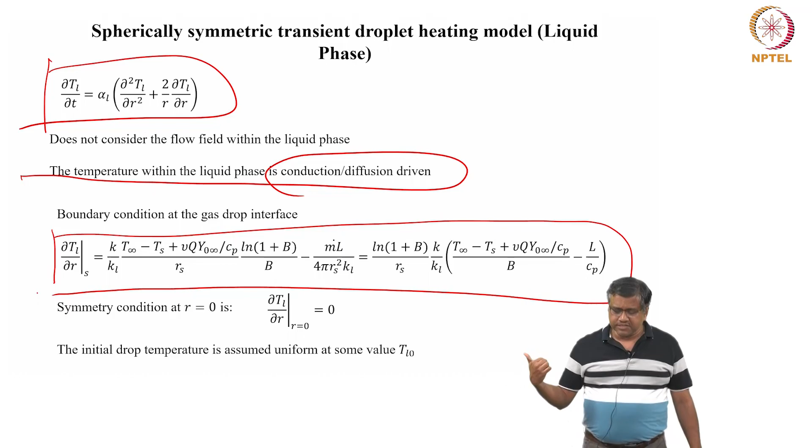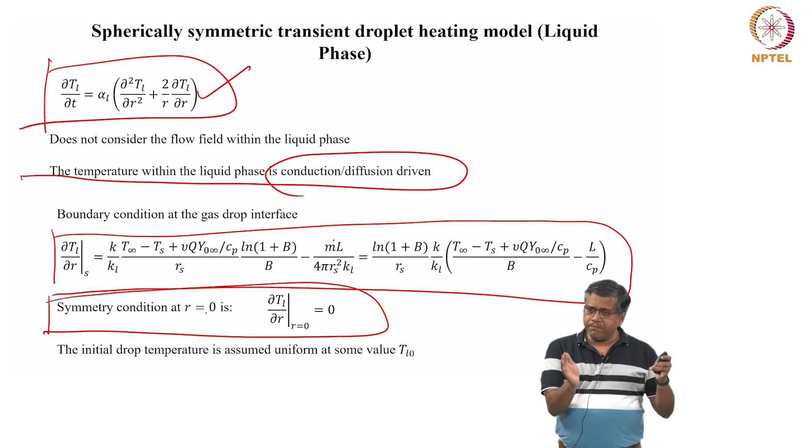Okay, the boundary condition sounds a little bit difficult, right? It's nothing difficult. If you look at it carefully, the heat is coming in and that is conducted inside, that's all there is. And since this is a second order PDE in 2 dimensions, you need a symmetry condition: at r equal to 0, the slope basically equals 0 because it is symmetric. So using these two things, you can solve for the temperature field inside the droplet, and outside the droplet you already have this.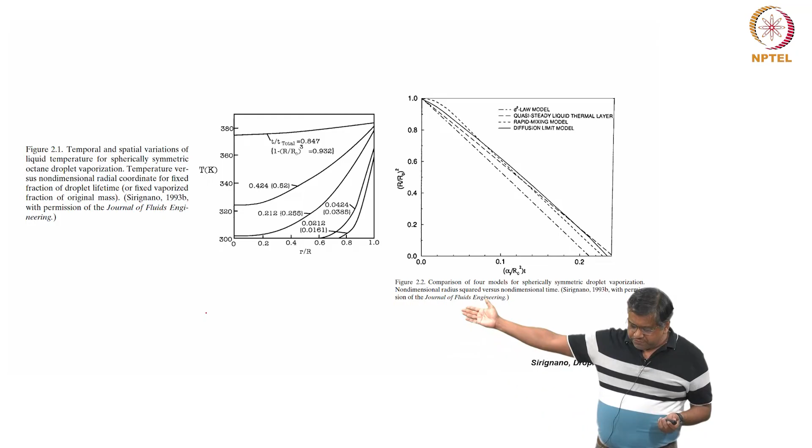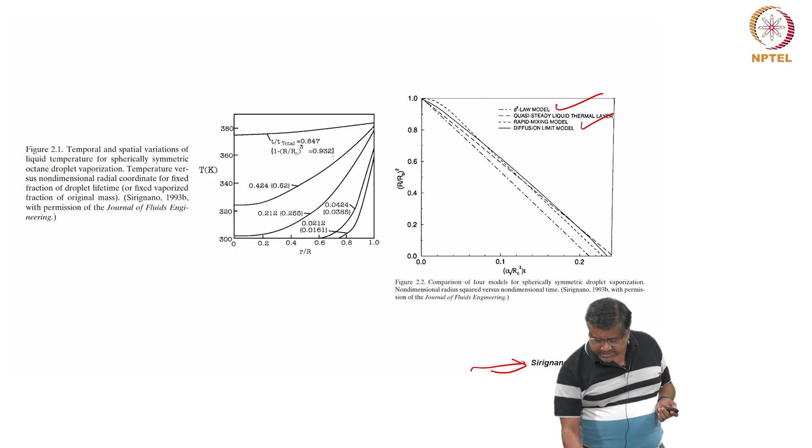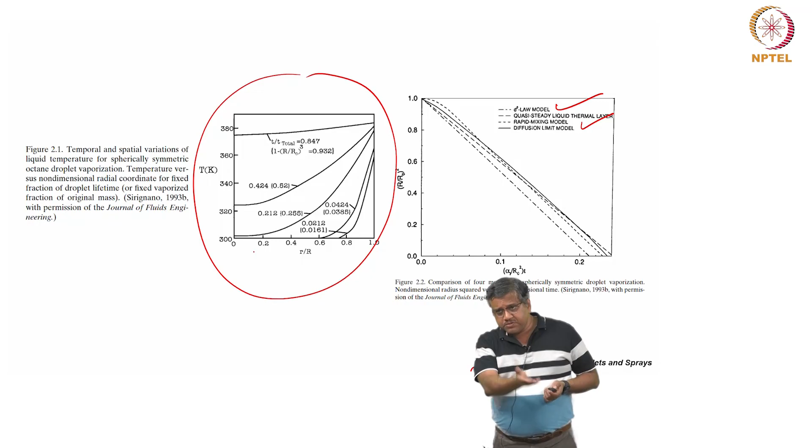Okay, and this comes from Sirignano, Bill Sirignano's work. This is done, for example, for the D square law, forget about rapid mixing and other types of models. The results for many cases look pretty much the same, but this one is the most interesting. It shows the temperature profile within the droplet as a function of time, within the droplet. This came out a long time back, in 1993, I think by Abramson and Sirignano probably.

Now comes the most interesting part, which we are interested in, which we do as a bread and butter kind of thing. This is called the vortex model of droplet heating. That means now you incorporate the flow, but here there is also a catch: you don't solve for the flow field, because solving for the flow field means you have to solve for the momentum, then solve for the gas phase, and the momentum equation is a nasty Navier-Stokes equation.

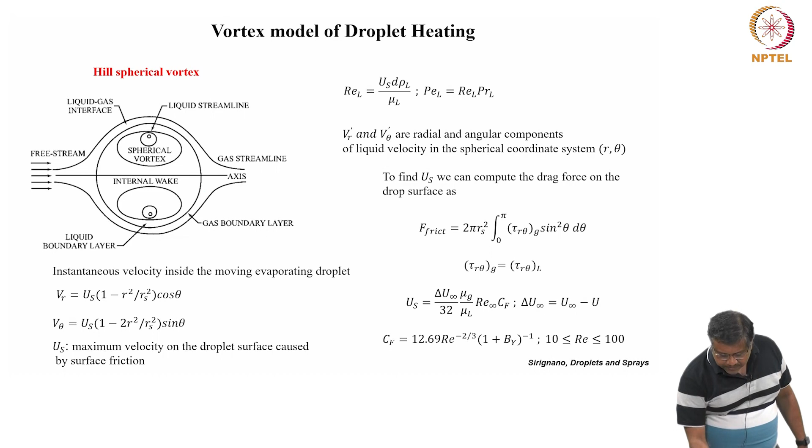So you want to avoid it at all cost. What you do instead is assume this flow field. This is the flow field that is given to you, I have given to you. You take it from me. I have told you that this is the flow field going to be. But of course, the process was not like this - it was not that Sirignano and others had a magic wand and came up with this solution.

But you can imagine why the flow field will be like this. Why will there be 2 vortices? Because you can see one rotates like this, one rotates like this, so at some point there has to be a plane of symmetry. That's why you have a toroid on the top and a toroid at the bottom. So that answers this part of the question - why it will be like that. And if there is a flow created on the top, that flow has to be closed, otherwise you are invalidating your mass conservation. If you just have a flow going like this, there will be a depletion of mass, so it has to come back - everything that goes comes back, right? So that is exactly what is happening. Rationally, if you think about this particular flow, it makes sense. There is a symmetry line, and then there is a turning. This makes sense? Okay, good.

Now, how did he actually solve this? Do you know how he solved it? He used the Falkner-Skan group of solutions. When you have a curved surface, you know the Falkner-Skan? You guys don't know the Falkner-Skan type of solution? You only know the flat plate? If you curve the flat plate, what will happen? A flat plate doesn't have a pressure gradient, but this kind of plate has a pressure gradient that starts to develop. So what he did was take the droplet and make it into small pieces of straight surfaces - essentially he solved for a polygon. And for each of these faces, you could get the Falkner-Skan class of solutions. So he pieced them together.

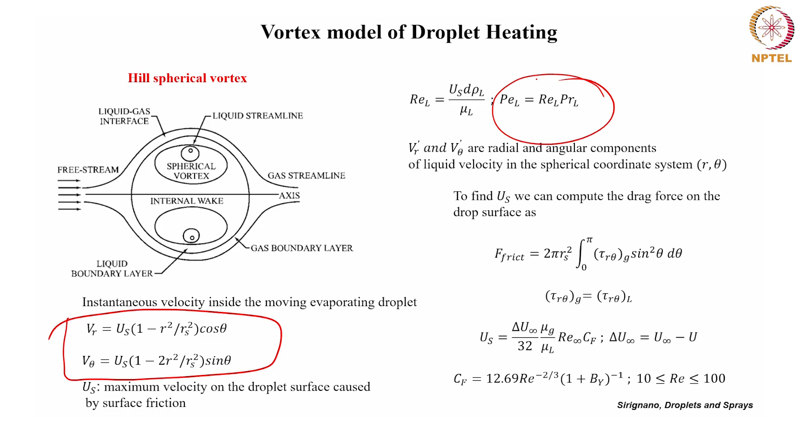Okay, so you guys need a crash course on what is Péclet number. This number comes into the picture because there is convection, because there is a flow velocity inside the droplet. What this flow velocity actually does is give rise to some interesting things. It is not just for academic purpose.

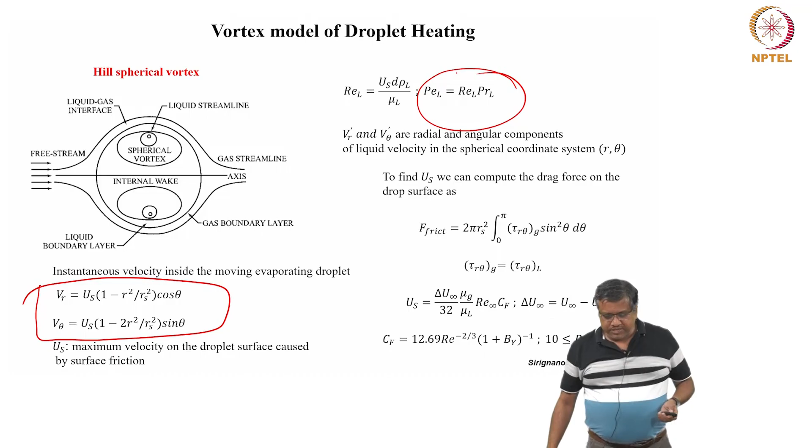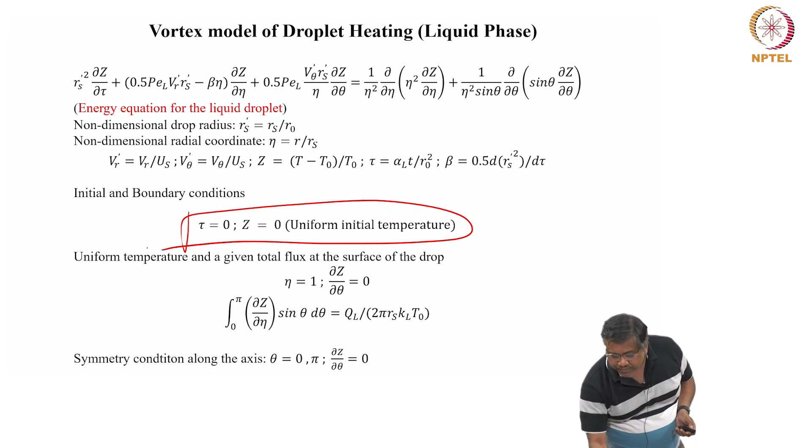And now the boundary condition becomes an integral boundary condition because of the flow considerations. Once you have all these things, you have everything within the liquid phase ironed out. Everything outside the droplet is already taken care of, right?

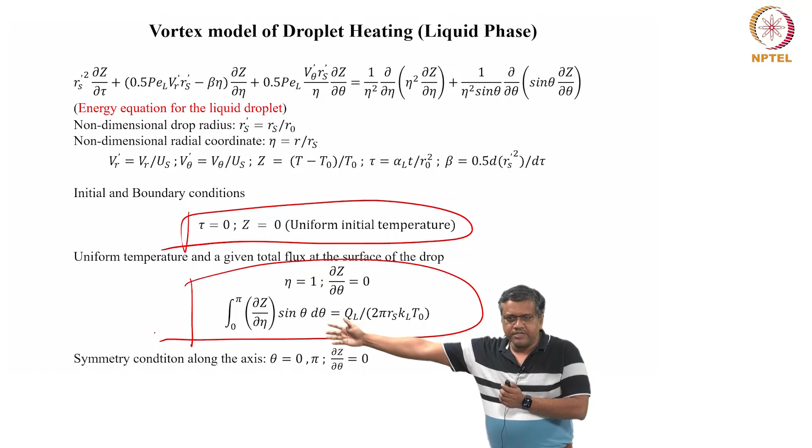All right, this is some of the results. This comes from Sriparna's work published in JFM about a year ago. This shows, for example, look at the temperature field over here, right?

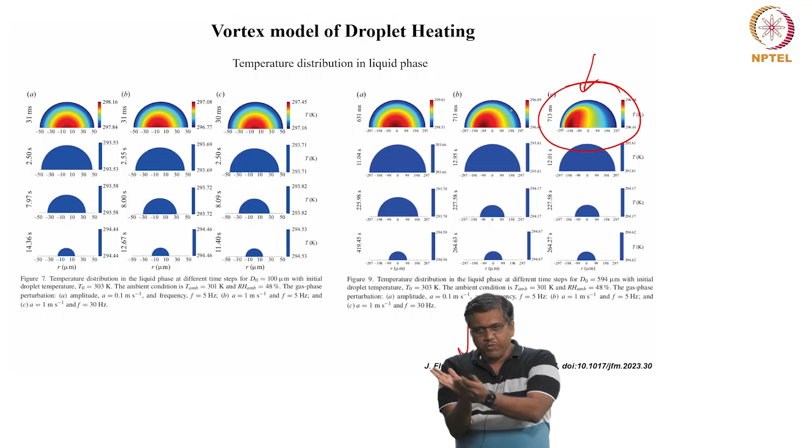Now comes the role of Péclet number, because you saw the flow field was like this. The conduction and convection, it's basically the misalignment. So what is conduction trying to do? It's trying to level out everything in the radial direction. So ideally in conduction, you should have these nice concentric circles. High temperature, high temperature, high temperature, right? Something like this. The moment you have convection, it is shifted because you saw the flow field.

And that is exactly what happens in these nice little pictures over there. Initially, with time, if you allow this to settle, everything will come back to a uniform configuration. But in cases where your droplet is actually traveling fast, say through a combustor, which has got 100 millisecond, 50 millisecond, whatever time scale, your temperature does not equilibrate. Not in this fashion. So this is temperature. K, or the alpha, thermal diffusivity, determines how fast this process is going to lag.

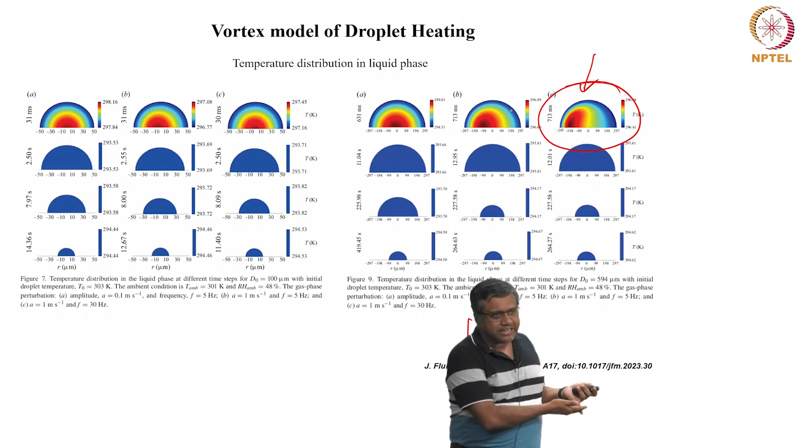But if you are going for the other one, the species, which is the diffusion, D, D is traditionally a bit slow to begin with. That means we are dealing with a Lewis number system which is greater than 1. In that case, these curvatures will be even more aggravated.

So that means if you are dealing with a colloidal system, for example, your droplet has got these small particles inside it, or it has got a solute inside it, and the precipitation that you are going to do, which actually leaves the baton to the spray drying kind of literature, your shell, if you look at that as your shell, is going to be non-uniform.

I don't know this work, it's very recent. And this is recent. There are other works we did earlier. This is your work, this is mine, this is mine. There are others where we actually modeled this for respiratory droplets.

So this is salt, but essentially the concept is the same: if you have a solute, which is a non-volatile solute, and it comes out of the precipitation, what happens is that if the process is too fast, that means it's not a very nice and easy process, then you will get these shells, because if you now rotate it.

But I see the time is 11 seconds even. Yeah, this is for respiratory. So, I mean, it's huge for the application. Yes, this is for respiratory.

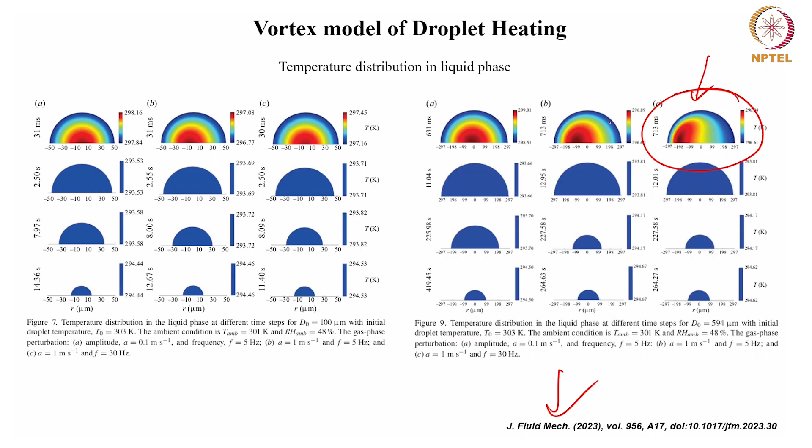But if you are talking about applications like 100 milliseconds, or plasma spray process, it's interesting to see what is happening until one second. Correct, yes. At the end, the dimension of the droplet is not changing almost, because here it will not.

Then after that, in cases where the process is very fast, you will get non-uniformity in your solute concentration. That means if you translate now to a spray drying kind of application, or when you are surface coating an application, your shell structure is going to be non-uniform to begin with. And that all happens because you have taken the flow into consideration.

No thermal conductivity model can predict this, because it is not there. Of course it's not there, it's uniform to begin with. And there comes the Péclet number, becomes important. If the Péclet number is not important, all these things will be the same as your thermal conductivity model. Understood? Okay, great.